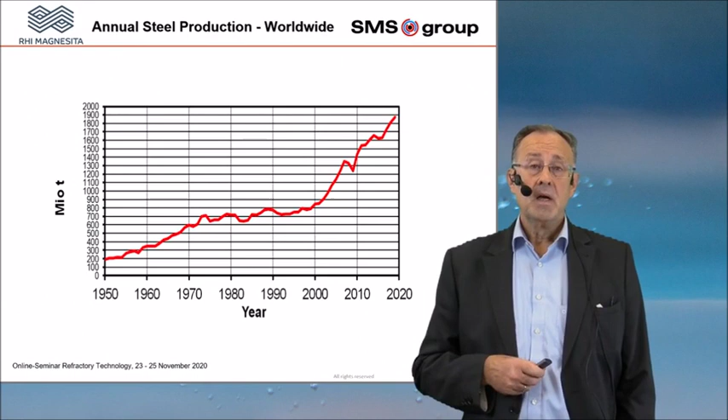On the next slide, you will see the following. Don't read all the numbers and figures here on this sheet. The important point is that round about 2/3 of the steel production is produced in a BOF converter, and round about 1/3 is produced in electric arc furnaces. This is important to know because the main steel production at the moment is the conventional route via blast furnaces through the converter into secondary metallurgy. But one thing is important. When you look here, for example, at the European Union, around about 60% of the steel production is produced in BOF shops and around about 40% in electric arc furnaces.

But when you look a little bit more in detail, it depends on the country and location of the steel production. When you look here, for example, at the Czech or the Slovak Republic, there's a huge amount of BOF steel production and a very small amount of electric arc furnaces. And when you look at Greece, it is the opposite. So it depends on the situation in the different countries, and it's the same in the rest of the world.

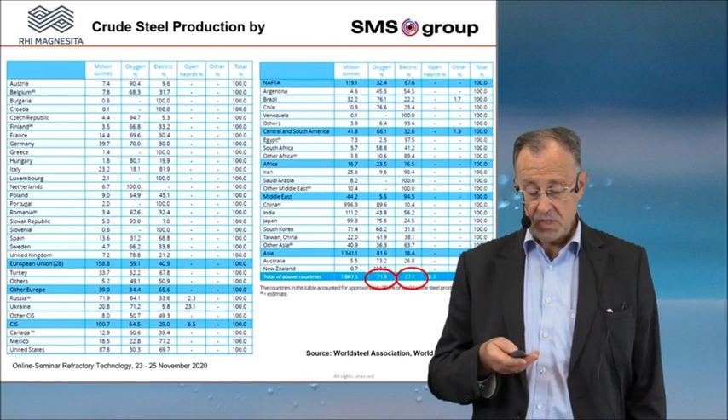Maybe in the near future there will be a dramatic change in this way of steel production due to the CO2 debate we have at the moment worldwide to reduce CO2 emissions, because the biggest emitter of CO2 is the blast furnace. So a lot of discussions at the moment are about changing the route to a direct reduction shaft and, behind the direct reduction shaft, running an electric arc furnace. We will see what happens in a couple of years, but at the moment there's a big movement.

Now we come a little bit more in detail to the basic oxygen furnace. What are the core components of an oxygen converter? In the middle, and this is the important point, you have a steel vessel. This steel vessel is relined with refractory material, where you put the hot metal and scrap in and where you start your blowing process. This vessel has a top cone, a cylindrical part, and a bottom cone.

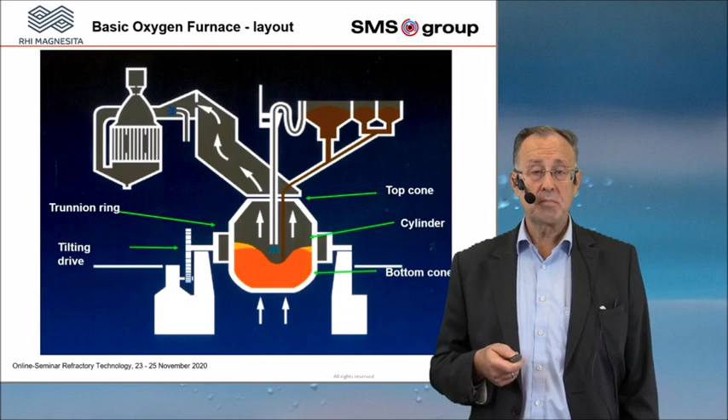Then it is fixed in a so-called trunnion ring. We have a big gear, a tilting drive, so that you can rotate the converter. This is important for the charging procedure and later on when you tap the steel out of the converter. To close the converter, you have here a bottom.

So we have two different types of bottom. Sometimes you have a replaceable bottom. That means for the relining purpose, you remove the bottom plate from the vessel, and then you can dismantle the refractory material inside the converter, and later on you can put a lift from the bottom into the converter, and then you bring all the bricks and all the refractory material for the relining inside the converter.

Other converters have a complete vessel without a replaceable bottom. Then it means that you have to put all your refractory material from the top into the converter for the relining purpose. The bottom is equipped with stirring plugs, so that you can stir during the blowing process. Normally you use nitrogen, and in case you have steel grades with a very low amount of nitrogen in the analysis, you can use argon. Later on I will explain why it is so important.

Then the big important point here is the oxygen lance. That means you drive the oxygen lance inside the converter, and then you blow the pure oxygen with a certain distance from the lance tip to the surface of the metal bath, and you try to penetrate one part of the oxygen inside the melt.

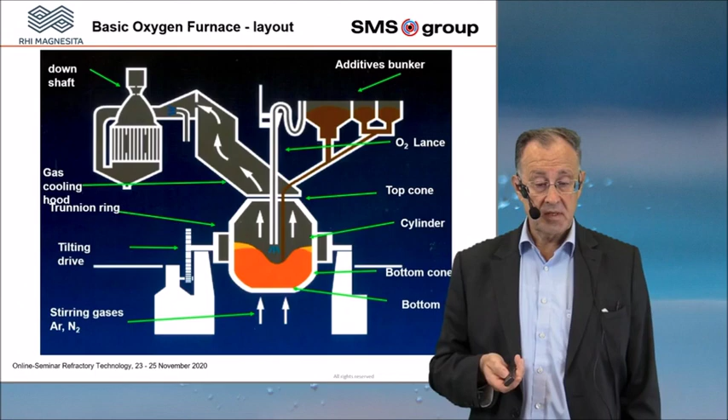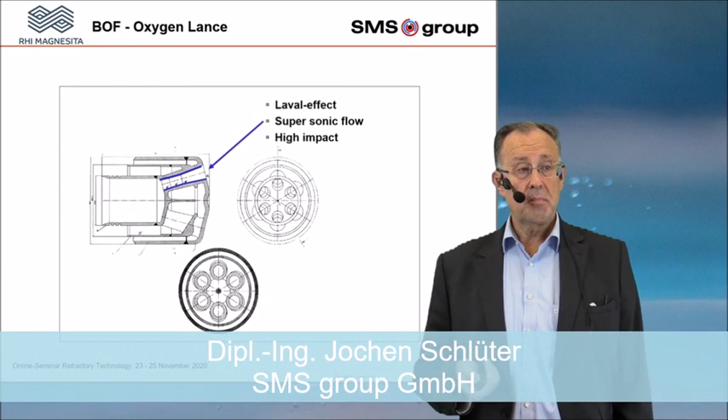One important point is the lance, and that means the lance tip. You have a water-cooled lance, and at the tip of the lance you have a copper lance tip. Why is it copper? Because you need a high heat transfer, because the lance is inside the converter in a very high temperature atmosphere, and you have to cool the lance to avoid it being destroyed. And one very important thing is the nozzle.

The nozzle is built with a convergent part, a cylindrical part, and a divergent part. This is important to know, because when you come with the oxygen from your oxygen supply and blow it through the nozzle, in the cylindrical part, which is a kind of throat, you have a velocity of max 1 Mach. That means sonic speed of 1 Mach. And this was found out by Mr. Laval: when you enlarge the area behind this cylindrical part, in the divergent part of the nozzle, you enlarge the velocity.

This is important to know, because when the oxygen leaves the lance tip, you have a velocity of 2 to 3 Mach. That means you double or triple the velocity of the oxygen stream coming out of the lance tip. This is important for the process, because then you have a very high impact of the oxygen stream on the surface of the metal bath, and some part of the oxygen can penetrate the metal bath and do the chemical reactions inside the bath.

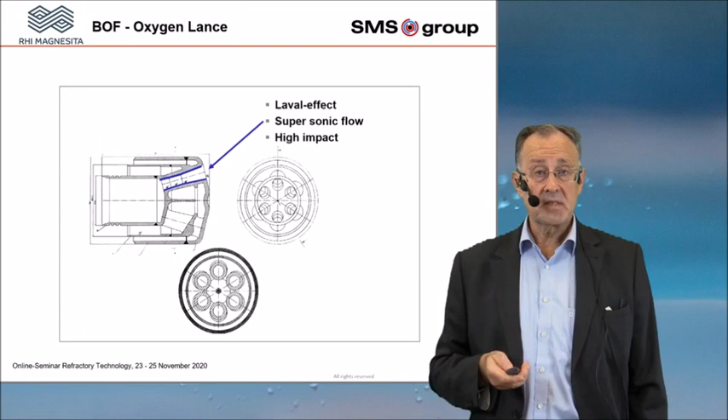Most lance tips have an angle of 17.5 degrees. In some cases, for example at HKM, the lance tip is 23 degrees. This is really unusual, and it depends on the geometry, meaning the diameter and the height of your converter vessel, and you have to find out the best type of lance tip to avoid any sticking of slag and skulls on your lance.

Only a few words to charge material. When you look here, at first you charge scrap into your converter vessel. Later on, when the scrap is in, you move the converter, in this case, into the other charging position, and you fill in the hot metal.

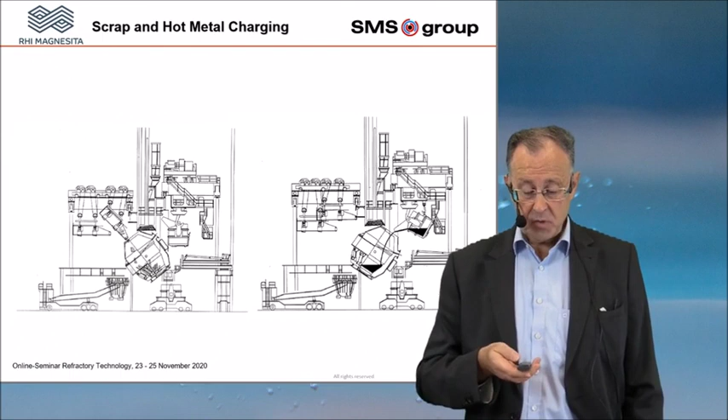This is important because at first you have to charge the scrap inside the converter, because very often, especially in winter time, you have some humidity, some water in the scrap, some ice or snow. And if you did it the opposite way, the risk is very high that you get an explosive evaporation of water, and the scrap is thrown out of the converter, and from the safety side it is really critical. So at first you add scrap, and later on hot metal.

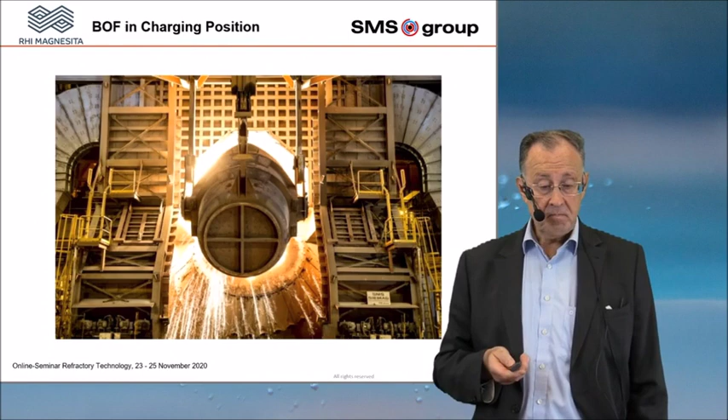Here is a picture of a converter where the hot metal is filled in. So what are the additions and additives you add into the converter? At first, very important are all the slag formers you put in the converter. The main portion is lime, or sometimes dolomite lime or MgO carriers. This is very important because all the oxides you produce during your blowing process must be caught and bound in the slag. For this, lime is absolutely necessary, so that you can collect all the oxides coming out of your blowing process.

Then you can add coolants in the BOF process via the bunker system. For coolants, ore or pellets are very good because they have a high cooling efficiency, because the reduction of the ore is an endothermic reaction. That means it needs energy and cools your process down. Or you can use dust briquettes or cooling scrap. It depends on the situation and on the cost price basis for the process.

Sometimes you need some heating agents so that you can correct the temperature. Very often coke is used. That means you bring artificial coke inside the process, and this coke is burned with the oxygen, and this is an exothermic reaction. That means you get a lot of energy from the combustion of coke.

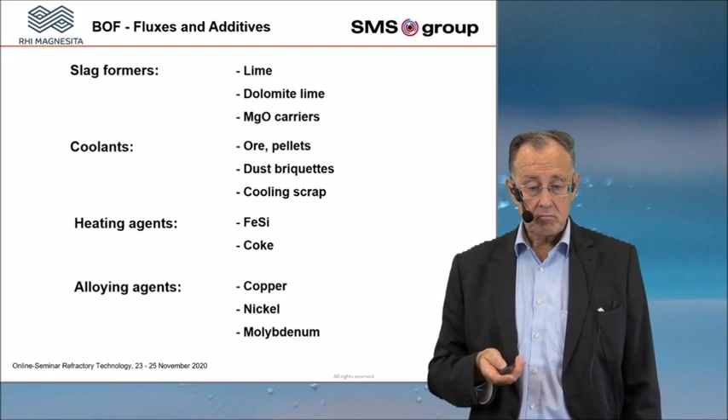Let us talk about the process sequence and the place of reactions. What are the main tasks of the BOF process? I think the main task of the BOF process is the reduction of the following elements. At first, you have to reduce carbon. Carbon is coming from the blast furnace, from the reduction process inside the blast furnace. And the hot metal is, depending on the temperature, saturated with carbon. The carbon value is around 4.5% inside the hot metal, so you have to oxidize the carbon.

The second important point is that you have to reduce the phosphorus, because phosphorus is not useful for material properties later on in your finished products. So you have to reduce phosphorus in the BOF converter. And the problem with phosphorus is that you can only reduce it in the BOF process, because you need an oxidizing atmosphere for the dephosphorization. After the tap of the BOF, there is no possibility to reduce phosphorus out of the liquid steel. Silicon and manganese will be reduced too. This is one aim of the BOF process, the reduction of the elements.

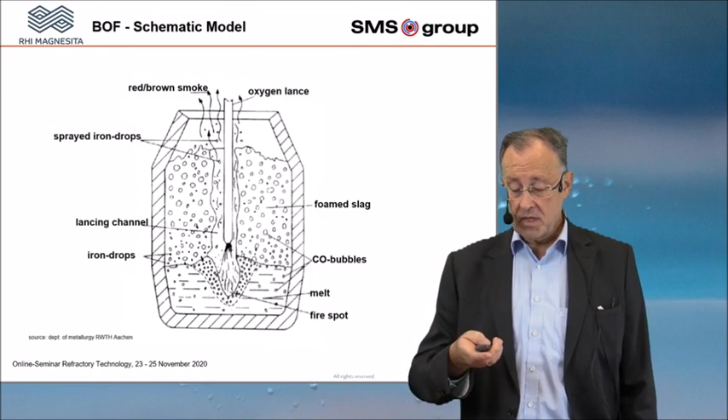The second aim is to achieve the right tapping temperature, because you have to put all the necessary temperature inside your metal bath. That means you need a temperature buffer for the alloying. All the treatment steps behind the BOF need a certain temperature, because there is a temperature consumption. When you add alloys to your liquid metal bath, you are losing temperature. You need temperature for all the process steps in secondary metallurgy, for example a vacuum treatment is temperature consuming. So you have to put the additions for all the treatment steps behind the BOF into the tapping temperature of the BOF.

But today, very often, and this is a complete change in philosophy, you have ladle furnaces behind the converter. So you can lower your tapping temperature and increase the temperature again, because you put the ladle in a ladle furnace for reheating of the melt.